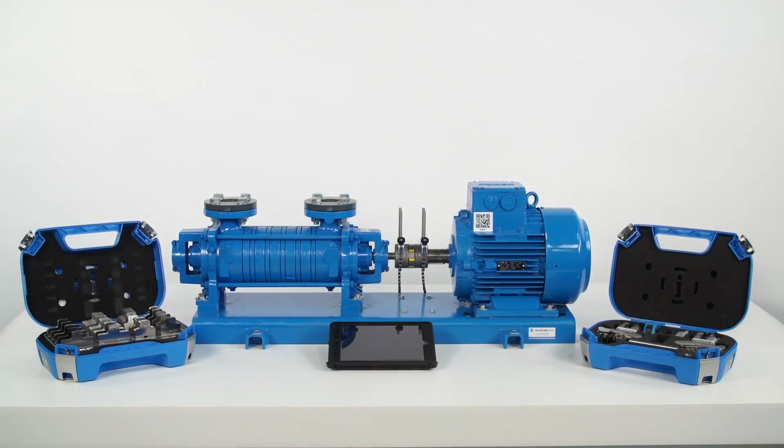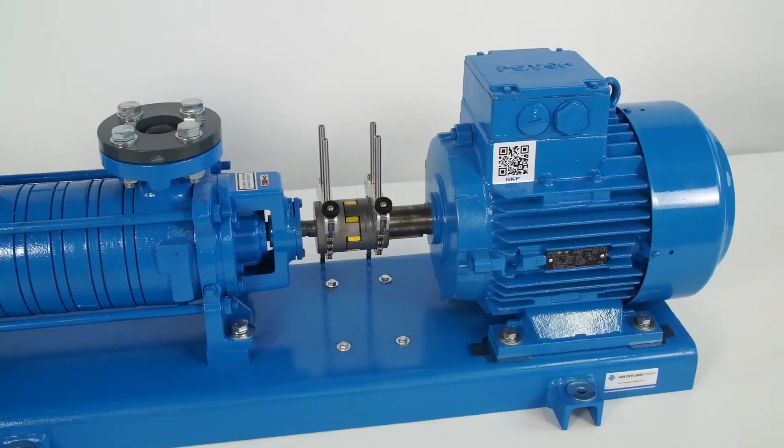This instructional video will show you how to perform an alignment job with the SKF shaft alignment tool TKSA51 and highlights its most important features. We will use a demo rig setup and guide you through the steps required to perform a simple horizontal alignment job.

The TKSA51 works with Apple iOS and Android tablets. SKF recommends using the tablet in a rugged case to provide extra protection. The measuring units are operated with an app available free of charge from the Apple App Store and Google Play Store. The app communicates with the tablet wirelessly using Bluetooth.

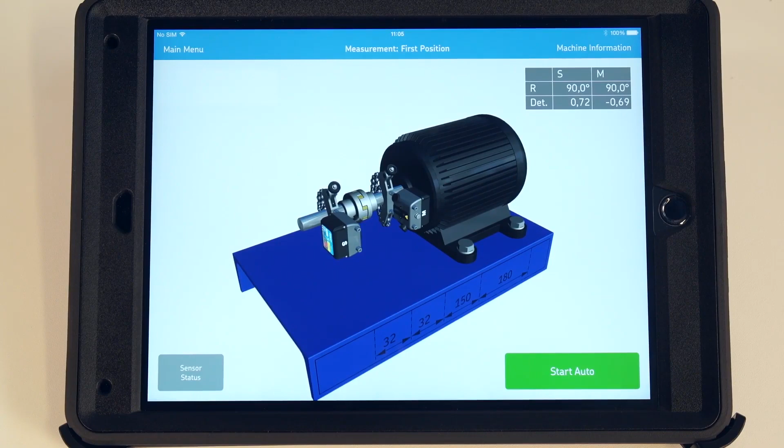The TKSA51 is a compact and comprehensive system. The complete system fits in a small SKF case weighing less than 3 kilograms, so it can easily be carried on an alignment job together with a case of machinery shims.

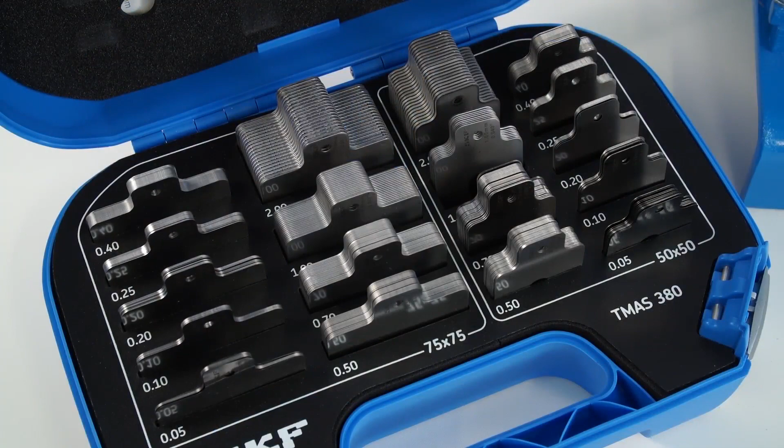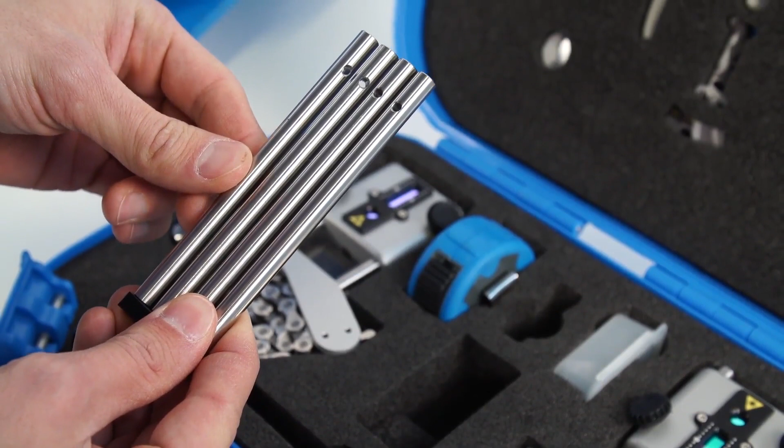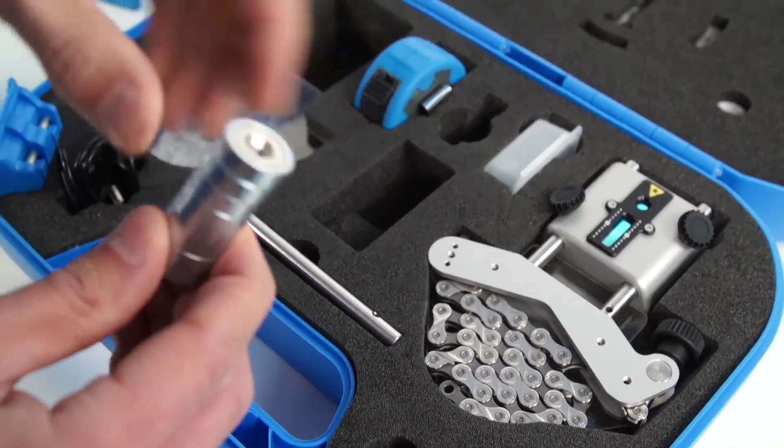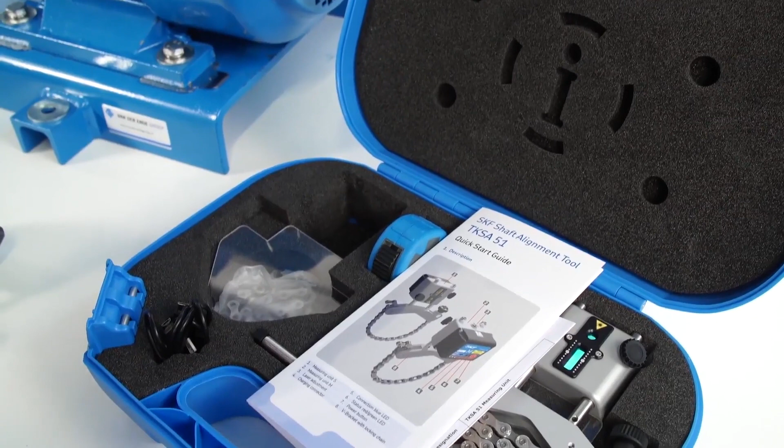The most useful accessories are already included in the case, such as extension rods to see over a coupling, extension chains for mounting the brackets on large shafts, and magnetic brackets to allow mounting the brackets on the side of the coupling. Furthermore, the TKSA51 is delivered with a quick start guide and a calibration certificate valid 2 years. Contact SKF for more information about recalibration.

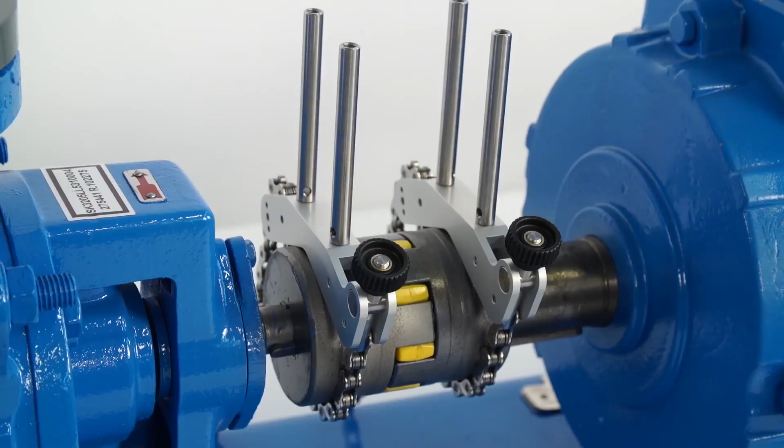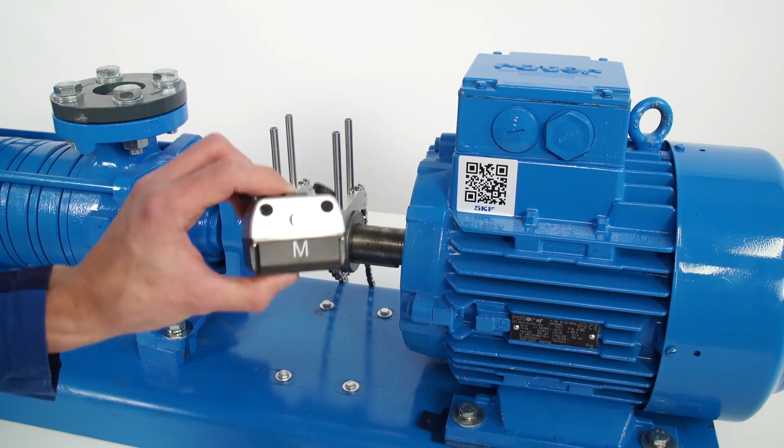The brackets can be mounted on the coupling if needed. When the shaft has a small diameter, we advise passing the chain through the inside of the bracket. Otherwise, pass the chain on the outside of the bracket. The brackets are already mounted on the shafts. The M unit must be mounted on the motor or movable side. The S unit must be mounted on the stationary side.

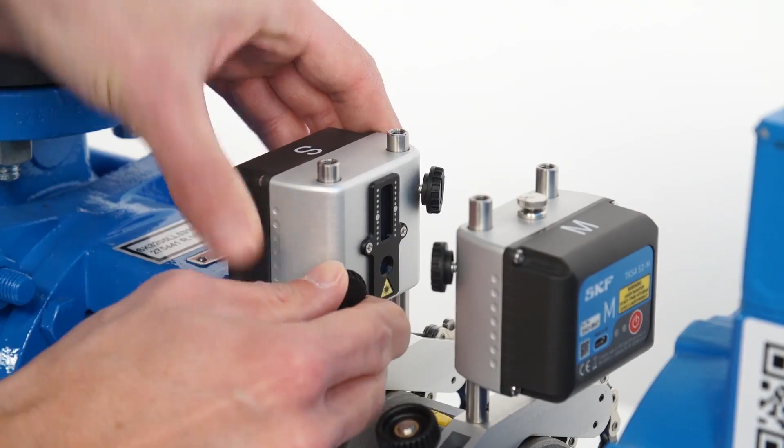Turn on the measuring units by pressing the on-off button in the back until the LED light comes on.

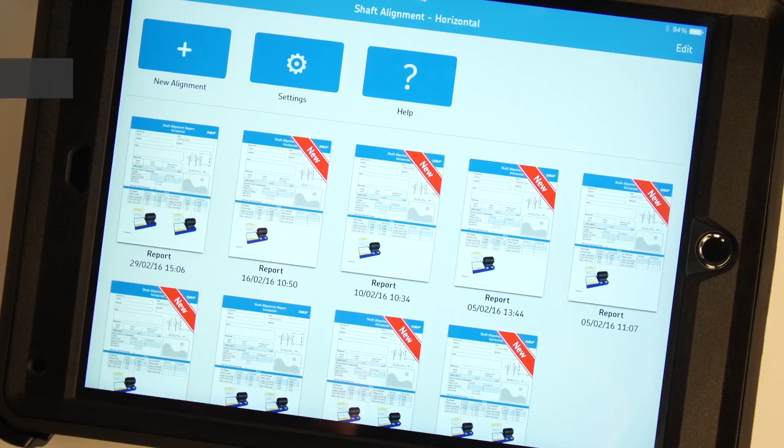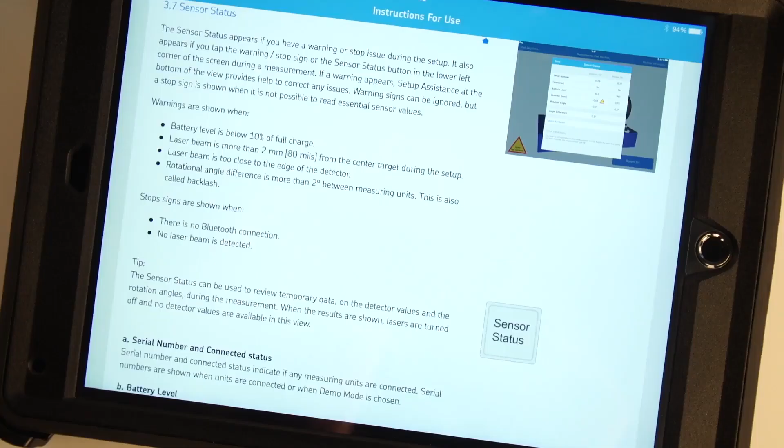Launch the app. Tap the Help button to access the instructions for use, find a distributor or technical support. Short instructional video clips are available from within the app to show you how to use the system.

Tap the settings icon. You can fill out the report template, add a company name, the name of the operator, and a company logo. This information will be automatically added to all new reports. It is possible to switch between metric and imperial units.

PDF reports can be easily accessed directly from the home screen. Tap the plus icon to start a new alignment job.

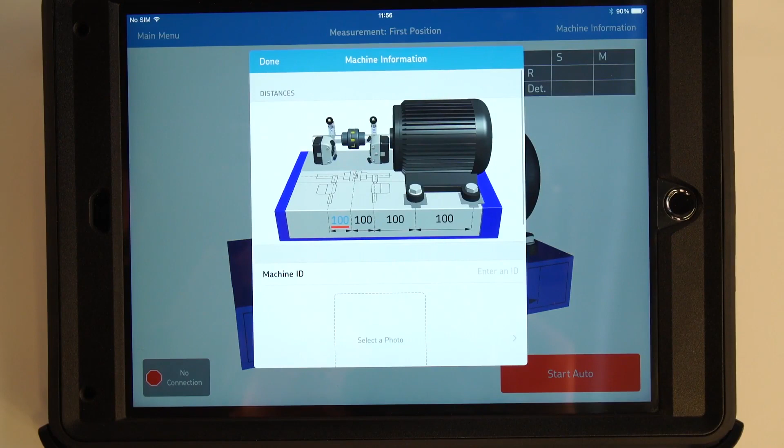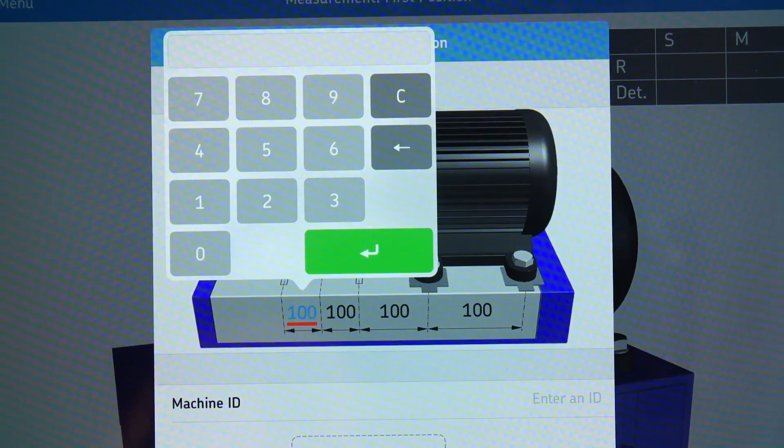On the machine information screen, the distances must be entered. Measure the first horizontal dimension from the center of the S unit bracket and the center of the coupling using the tape measure supplied. Tap the first dimension on the left and enter the measured value. Validate with the green button. The second dimension is measured from the center of the coupling and the center of the M unit bracket.

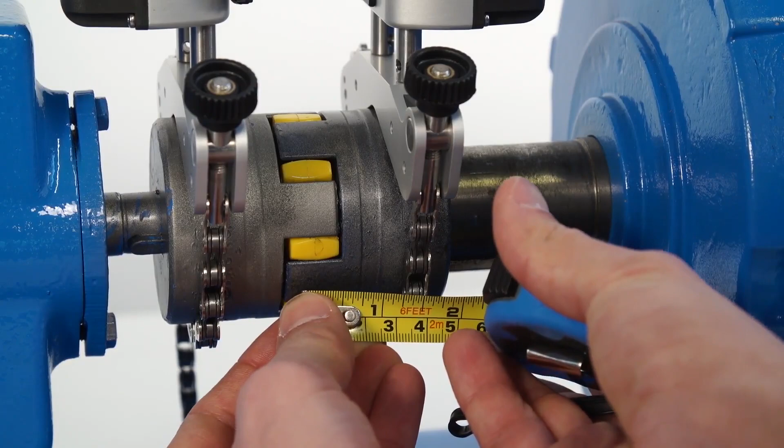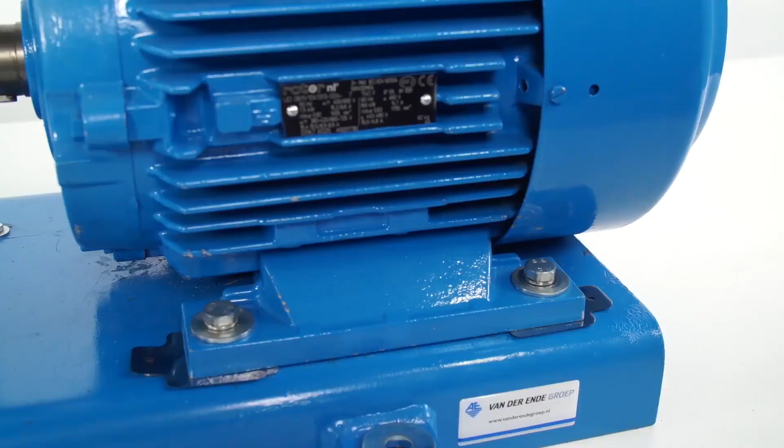The third dimension is the horizontal distance from the center of the M unit bracket to the front bolts of the motor. The last dimension is the horizontal distance between the front and rear bolts of the motor.

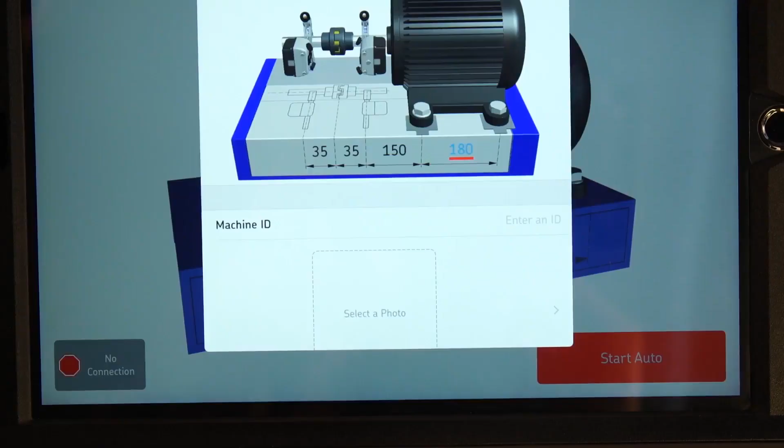It is also possible to enter a machine ID and add a photo of the machine, which will be shown in the report.

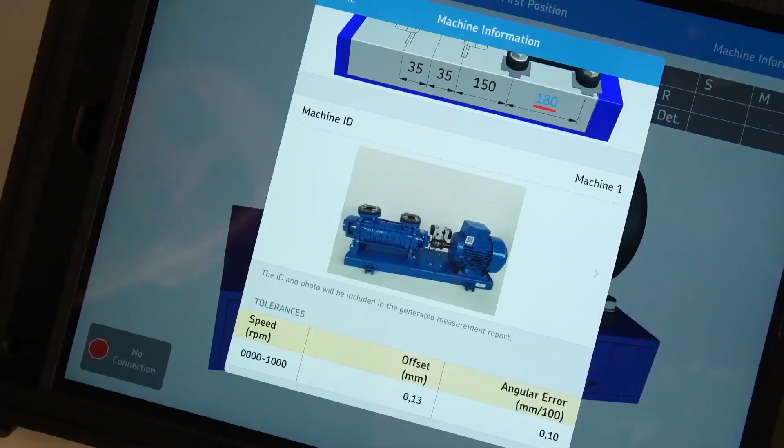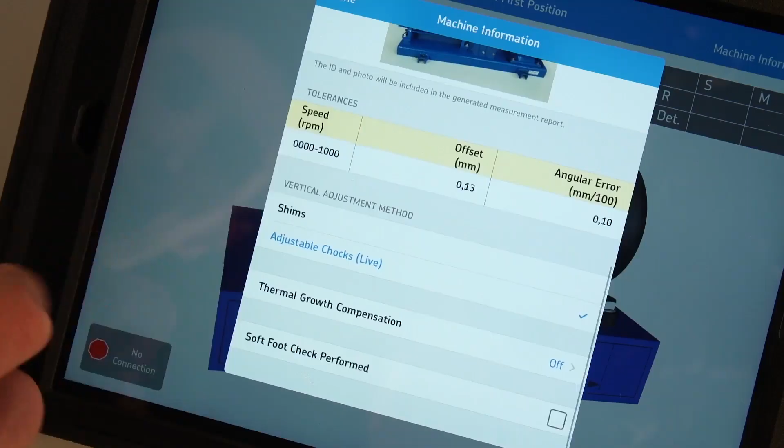Tap on the Tolerances table. The system uses tolerance to decide if the machine is aligned or not. The operator must enter the tolerances for the machine based on the knowledge of the machine and coupling type. Alternatively, a table of preset tolerances based on motor speed is available. Read the speed of the motor and select the corresponding tolerance.

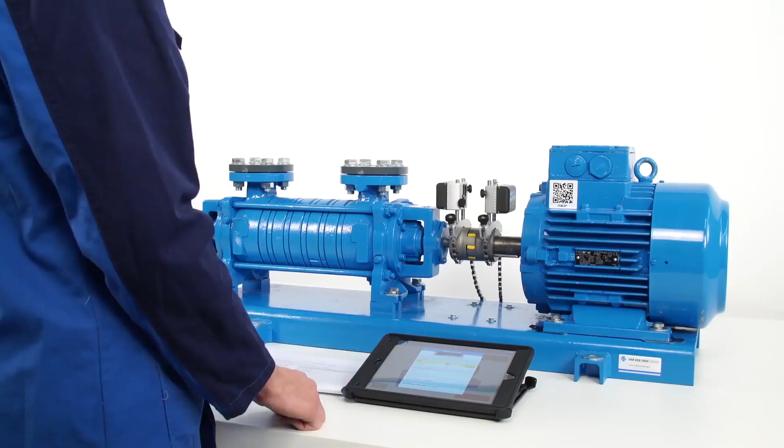During vertical correction of the motor, the operator can choose to view fixed or live correction values. Choose shims for fixed correction values, or choose adjustable chocks for live correction values. Fixed values are efficient for beginners, whereas live values give experienced operators more control.

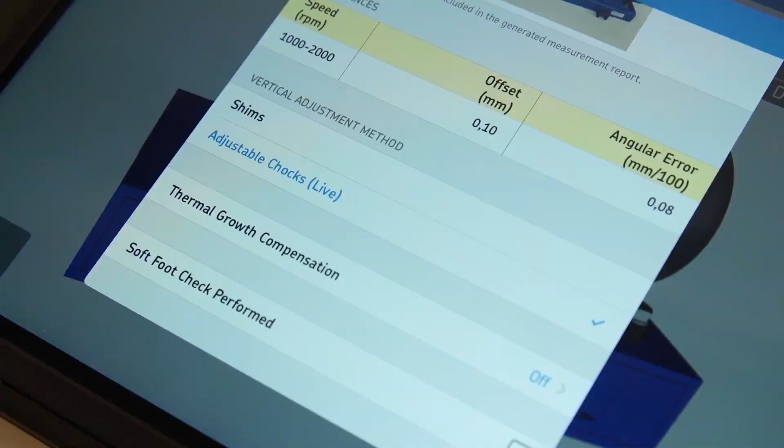Tick the soft foot check performed mark if soft foot has been checked. If the operator fails to align the machine after a couple of attempts, a soft foot might be responsible. In that case, check for soft foot using the Soft Foot app. A separate app called Soft Foot is available to measure and correct soft foot with the TKSA51.

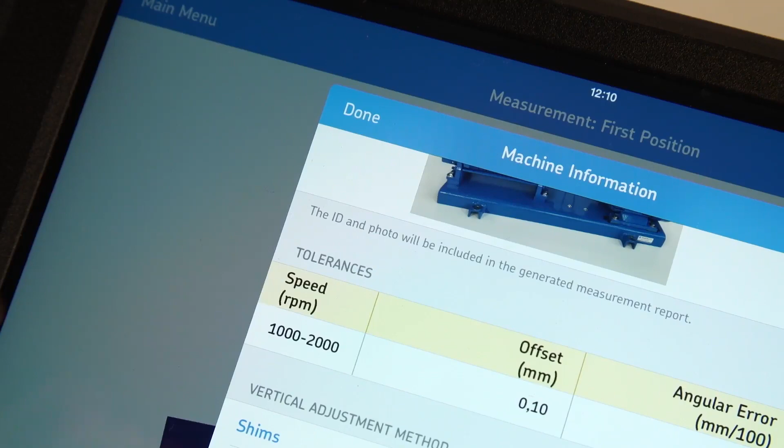Tap on Done once the machine information page is filled in. The sensor status page shows the status of the measuring units. It will be shown automatically to the operator when needed, for example when the app is used the first time or measuring units are not connected.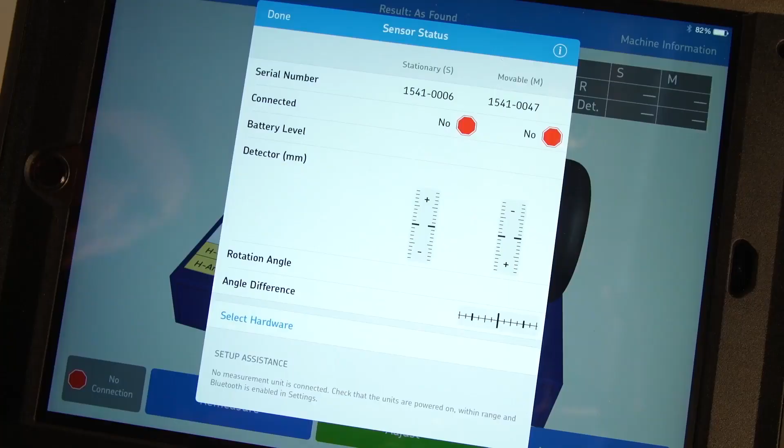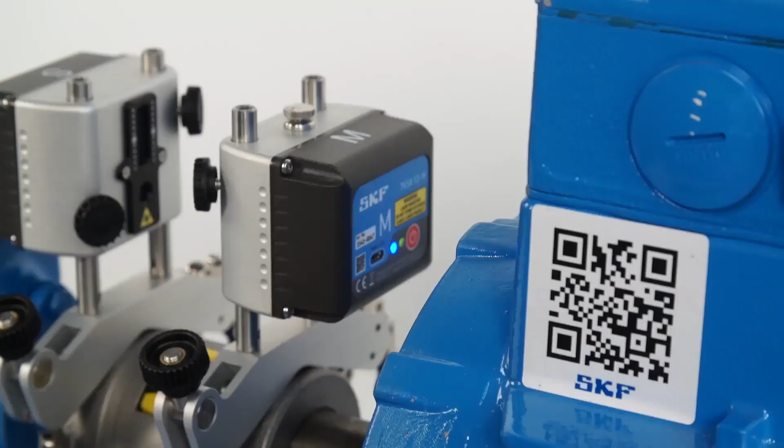The first time measuring units are used with a tablet, they can be connected by tapping on Select Hardware. Tap the serial number of each measuring unit and tap Done. If the measuring units do not connect, make sure Bluetooth is enabled on your tablet and that the measuring units are both switched on and charged. The sensor status screen also helps you adjust the measuring units before the first measurement.

The two measuring units should face each other. If the angle difference is greater than 2 degrees, correct this by manually moving one measuring unit. Then tighten the brackets firmly.

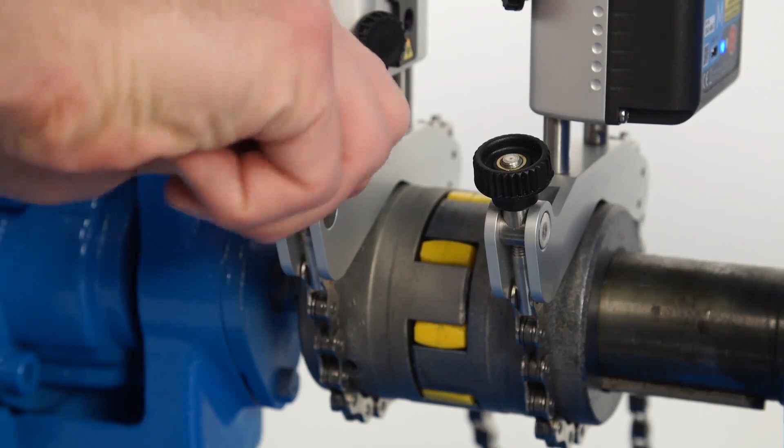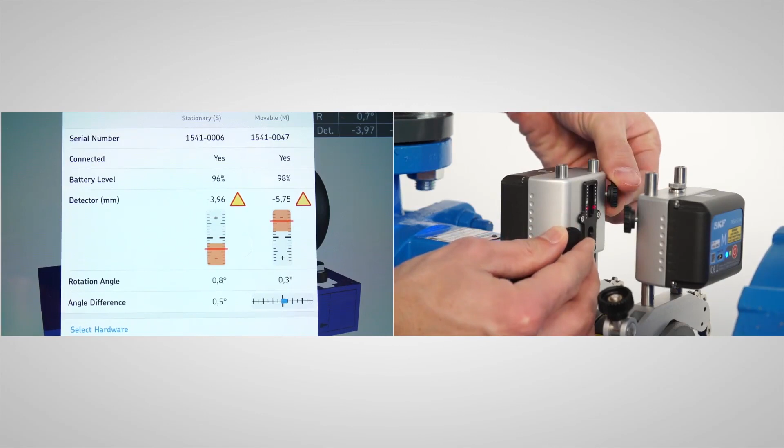Tighten the M measuring unit on the rods. Adjust the position of the S measuring unit on the rods so that the center of the detector aligns with the laser line from the M measuring unit. Tighten the S measuring unit.

Turn the knob on top of the M measuring unit to adjust the laser line to the center of the detector of the S measuring unit. Now the setup is complete.

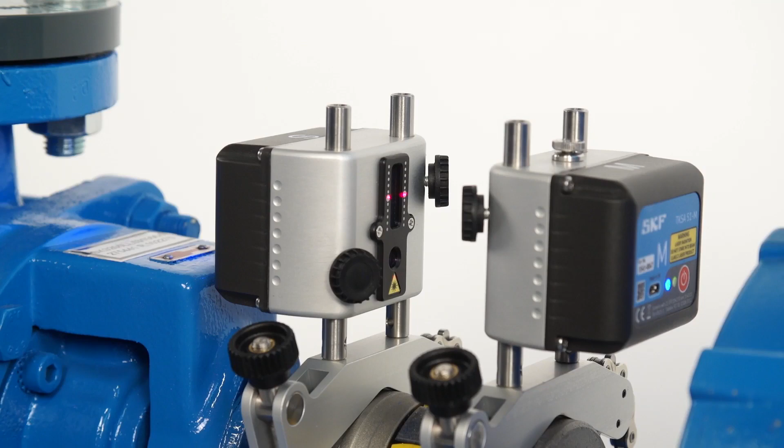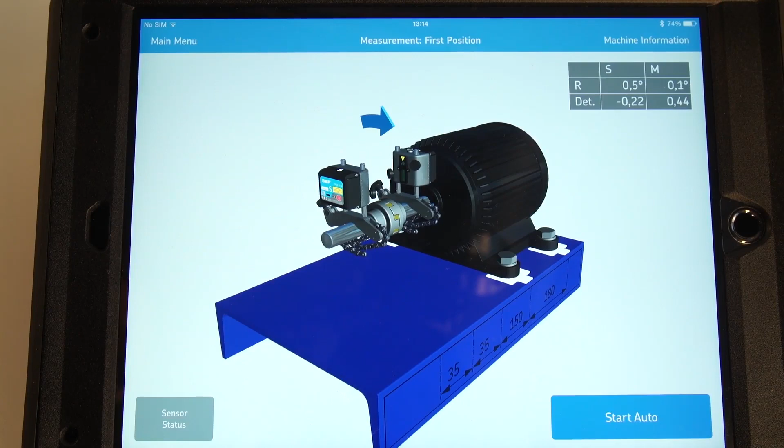During measurement, it is not allowed to make adjustments to this setup. Tap on Done. The 3D live view allows the operator to freely rotate the machines from any angle. No matter which side of the machine you are, the display will adapt to your position.

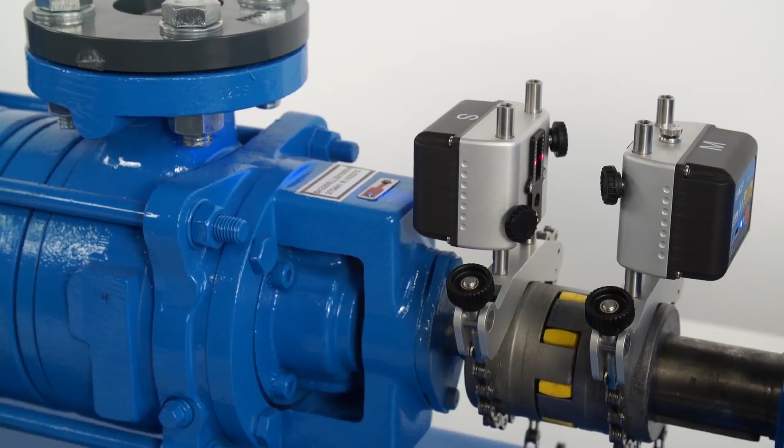The TKSA51 allows starting a measurement at any angle. 3 measurements must be taken with a minimum angle of 20 degrees between each. Measurement angles lower than 90 degrees are useful when the space to rotate the shafts is limited.

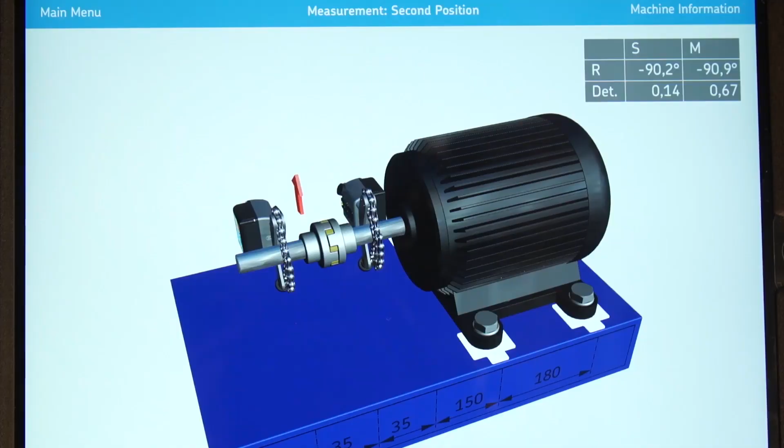However, we recommend using the traditional 9-12-3 or 3-12-9 measurement method whenever possible. This means taking 3 measurements at 9 o'clock, 12 o'clock and 3 o'clock. The arrows around the measuring units guide you towards the 9-12-3 positions.

A red arrow means you cannot take a measurement. Blue means you can take the measurement.

For the first measurement, rotate the shafts towards the 9 o'clock position. Rotate the shaft by touching the coupling or shafts, never by pulling or pushing the measuring unit's brackets. Take out any play in the coupling by rotating the shafts in the same direction for all 3 measurements.

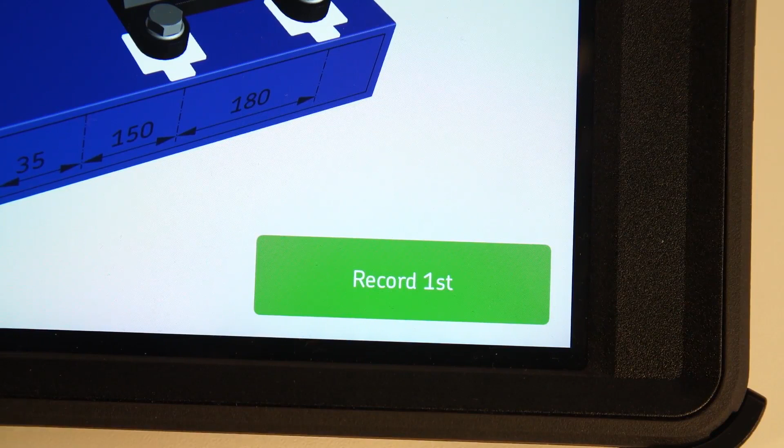When the measuring units are within the 9 o'clock measurement area, the record button becomes green and the arrow disappears. Tap on Record first. Move the measuring units to the 12 o'clock position and tap on Record second. Move the measuring units to the 3 o'clock position and tap on Record third.

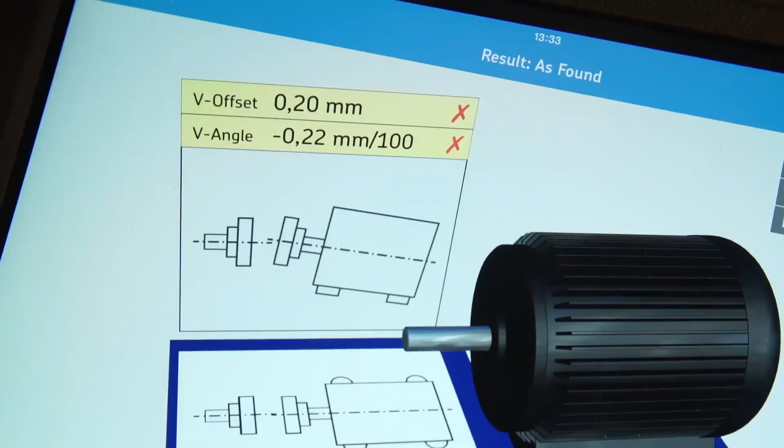The result page shows the measured misalignment results on the movable machine with illustrations and compares the measured values with the chosen tolerances. Misalignment is a combination of offset and angular misalignment. Both have to be corrected in the vertical and horizontal planes.

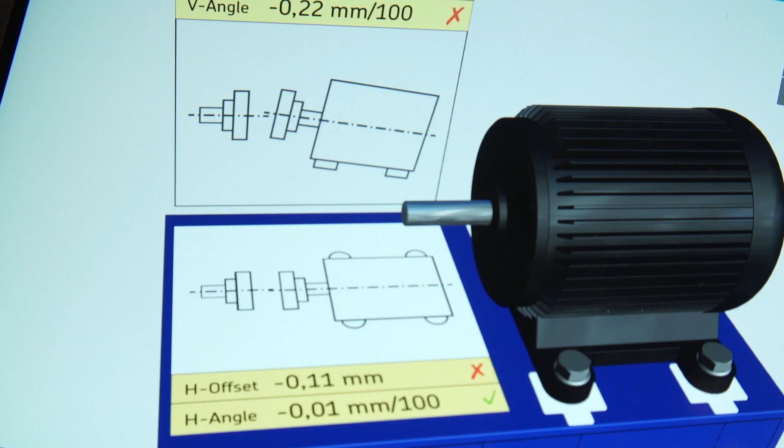At least one red cross indicates the machines are misaligned. Tap on Adjust to move onto the correction screen. In shims mode, the amount of shims to be added or removed is shown.

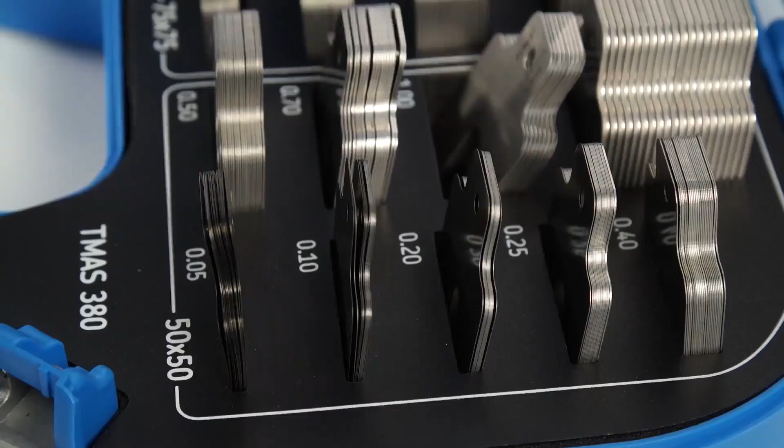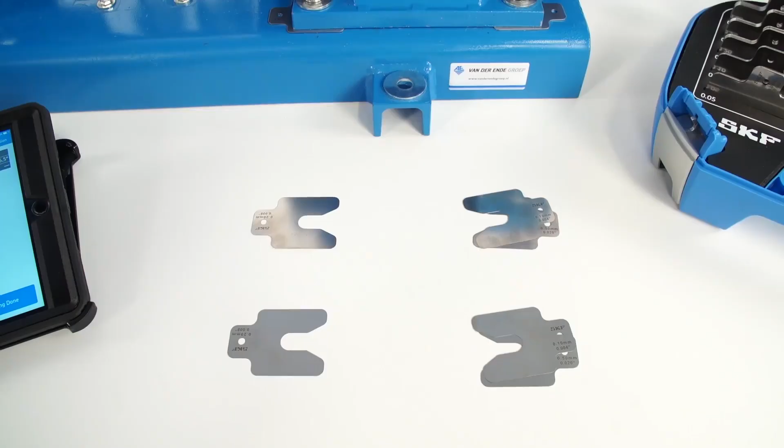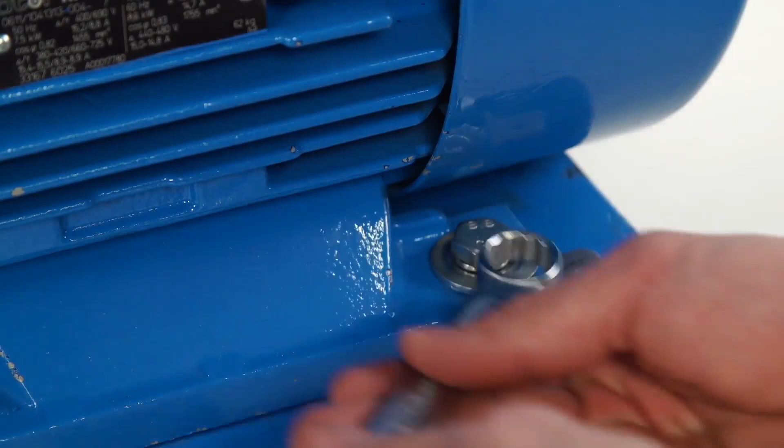Do not forget to correct all 4 feet of the movable machine. Loosen the bolts. Add or remove the shims. Tap on Shimming Done.

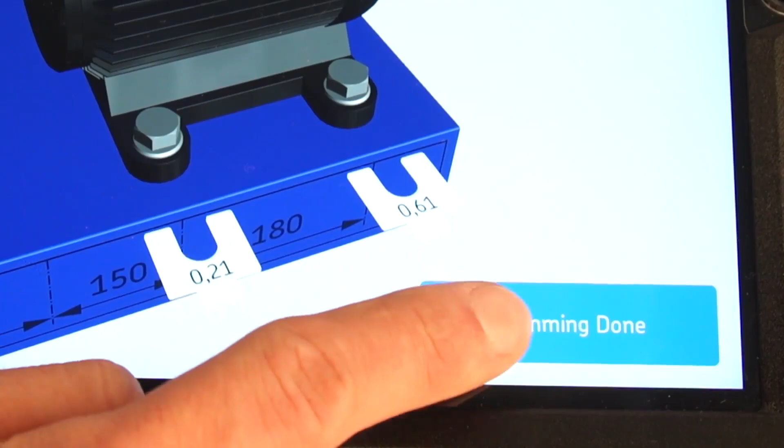Move the measuring units to a horizontal 3 o'clock position or 9 o'clock position if necessary. Move the movable machine towards the direction shown by the arrows. When the alignment is within tolerance, 2 green tick marks appear.

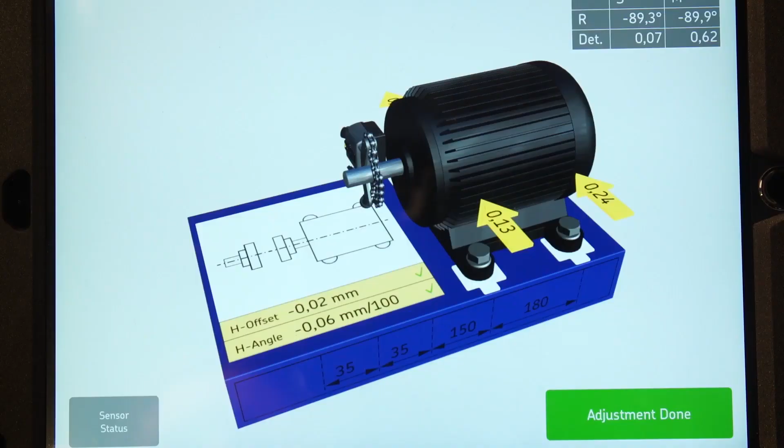Tighten the bolts. Tap Adjustment Done.

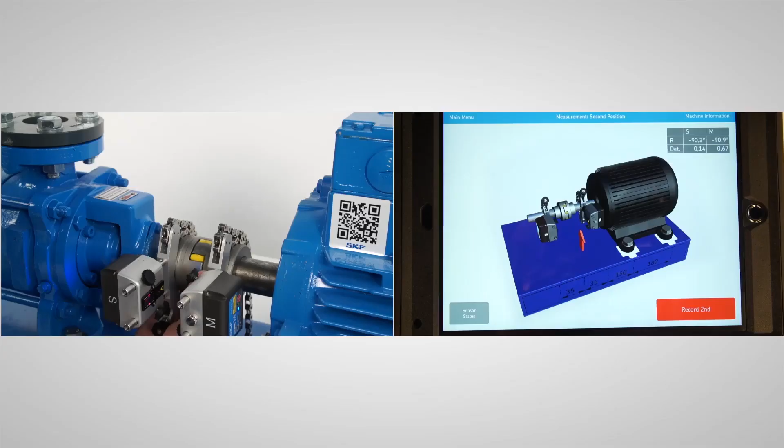Remeasurement is a necessary step to make sure the machines are correctly aligned. Tap on Remeasure and take 3 measurements just like before.

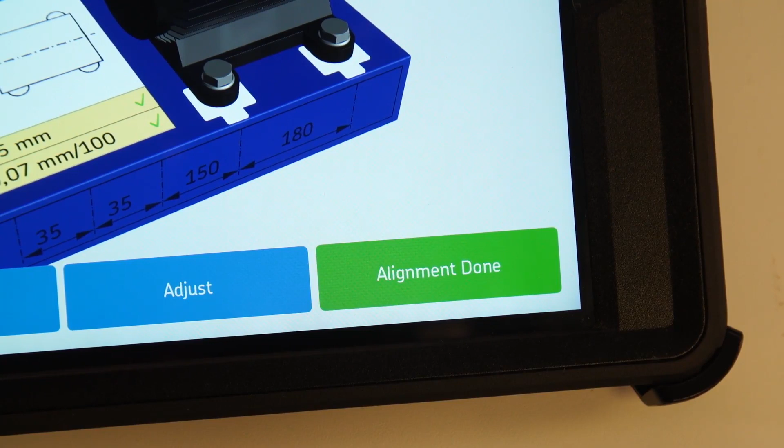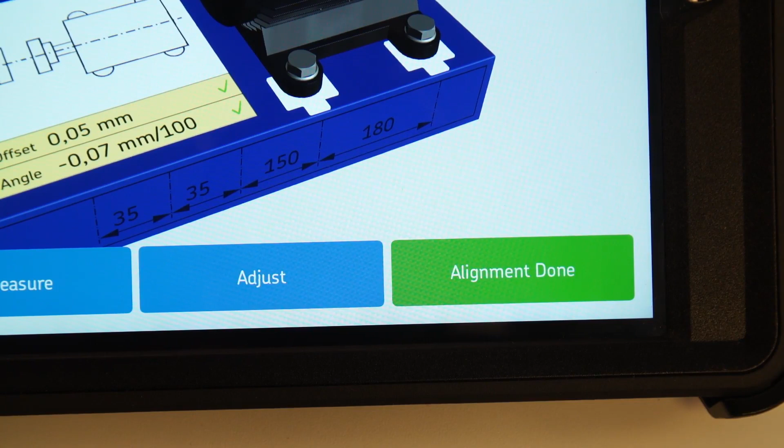If the misalignment is within tolerance, the Alignment Done button will be green. If this is not the case, tap on the Adjust button to correct the alignment one more time. Please note, it may take a couple of attempts before machines can be correctly aligned within the chosen tolerance.

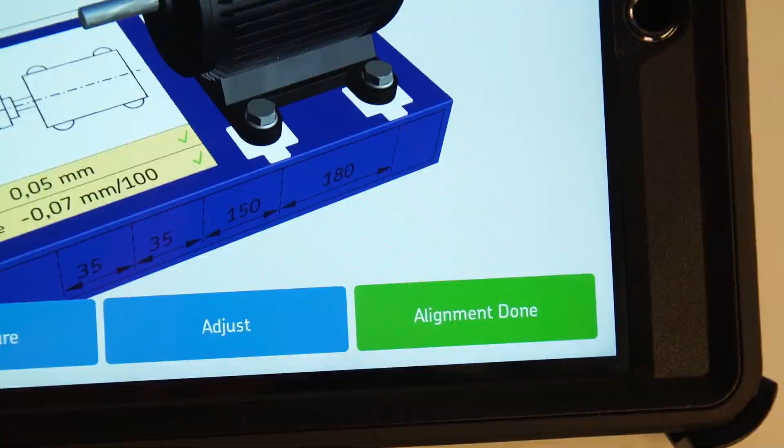When the machines are aligned, tap on Alignment Done. A PDF report is instantly created and will be marked with the label New on the home screen. Tap the New report to open it.

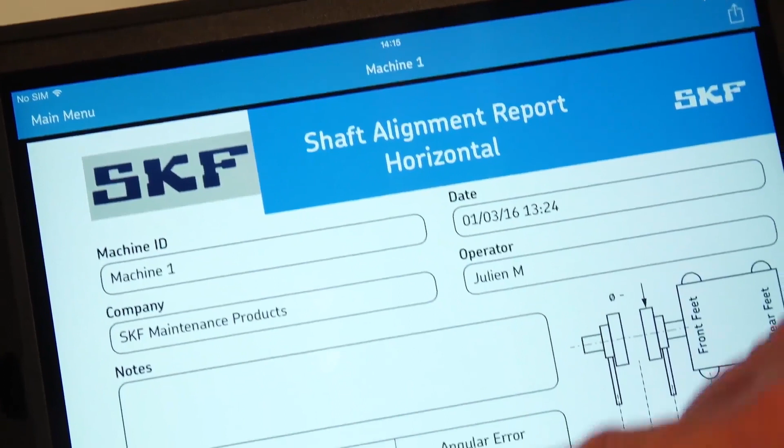Notes, a photo and a manual signature can also be added. Tap on the signature to open the edit screen. Tap on the signature field. Sign with your finger and validate with Done.

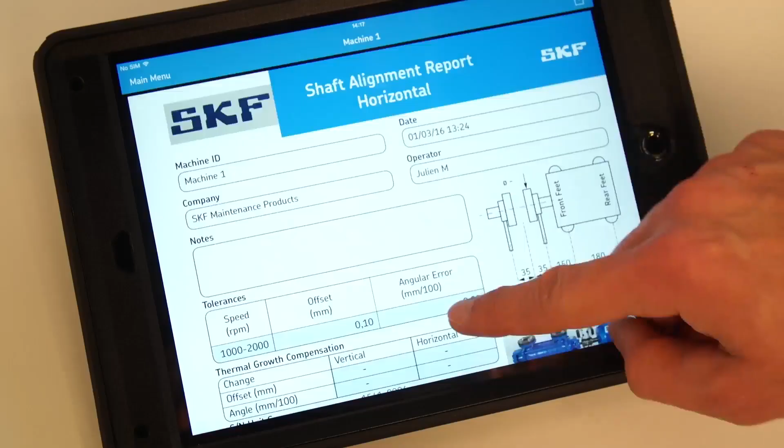Click Report to go back. Your signature is now added to the report. The PDF report can now be exported and sent by email, for example.

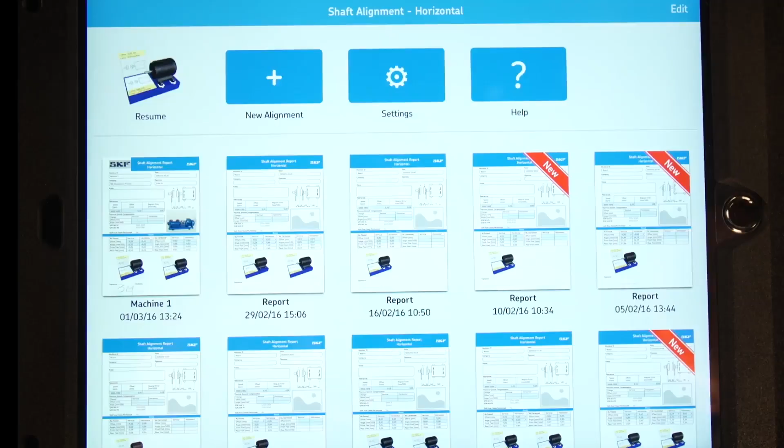We have one more thing to show you. A unique feature of the TKSA51, the automatic measurement function. Enable the automatic measurement function from the settings.

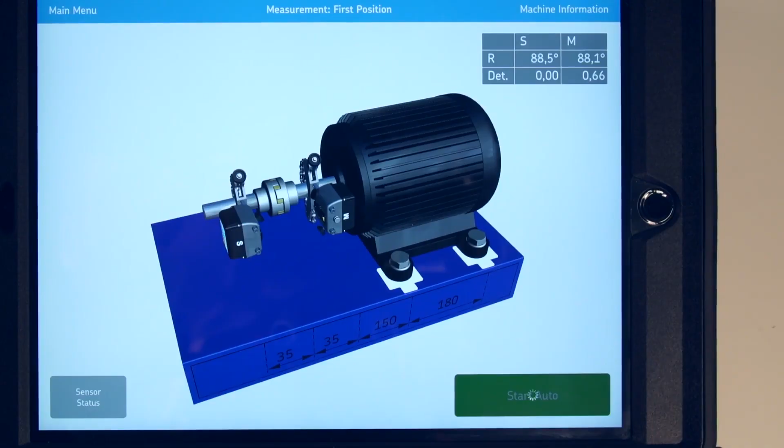The automatic measurement function allows you to take measurements automatically without the press of a button and therefore keep your hands free for rotating or holding the shafts. Place the measuring unit at 9 o'clock. Tap on Start Auto to start the automatic measurement.

Rotate the shafts to the 2nd position. As soon as you stop turning the measuring units, a 2nd measurement will be taken. Repeat to take the 3rd measurement.